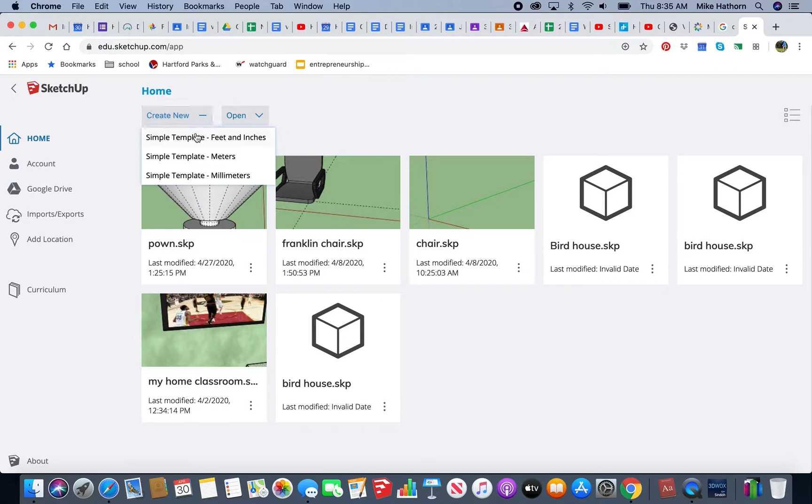Hi folks, today I'm going to teach you how to make a chessboard quick and simple in SketchUp for Schools. First thing you need to do is go to edu.sketchup.com. Once the SketchUp app opens, you're going to create new. I use feet and inches.

Delete the person. Grab the rectangle tool. Click once on the origin and then start dragging it out and click again anywhere. And I'm going to do 16 inches, comma, 16 inches, enter. Whoops, that says 16 feet, so here's how you fix the measurements.

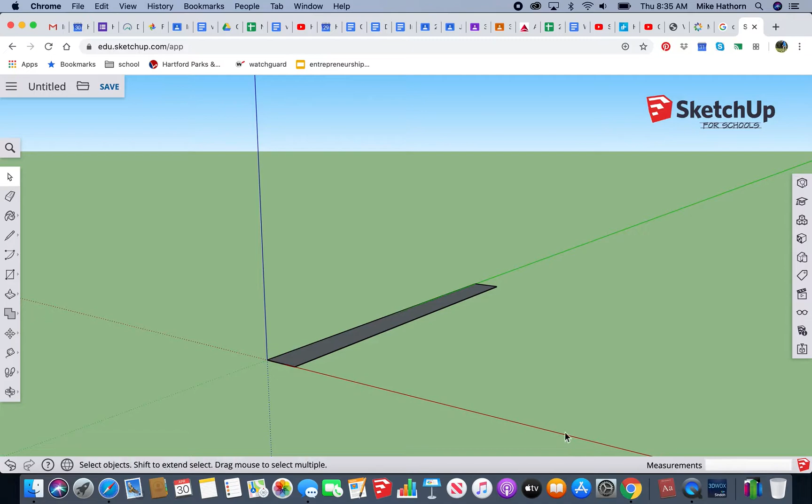Rectangle tool, origin, 16 inches, comma, 16 inches, enter. And this gives our rectangular shape for the board. Now I'm going to pull it up 1/2 inch.

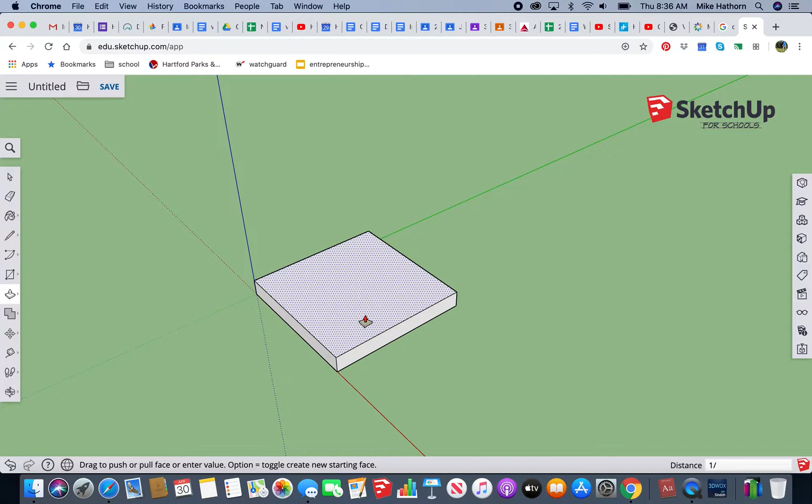I'm going to take the select tool, select one line, then the move tool with the option or control depending on the computer you're at to get the plus sign next to it. I'm going to drag it all the way to the other side. Click again, and then I'm going to go divided by 8.

Now I'm going to use the select tool with the shift key. I'm going to select 1, 2, 3. Whoops. And if you ever select something you don't want, you can just re-click on it. 4, 5, 6, 7, and 8. And then I'm going to use the move tool with the

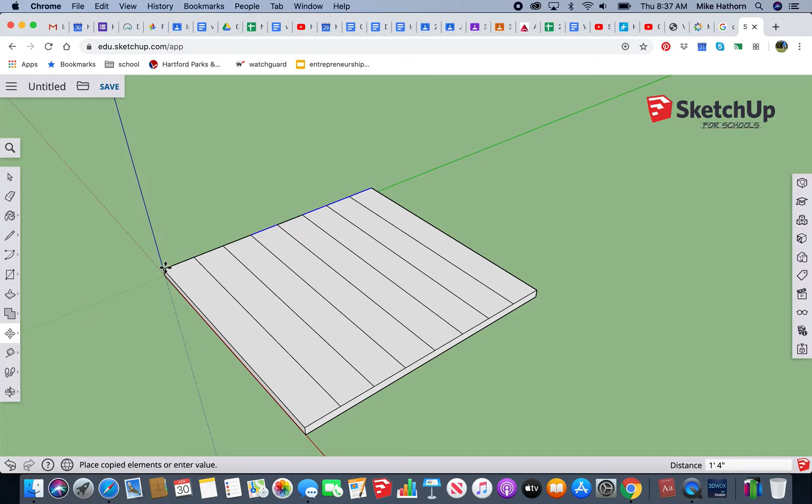option on a Mac, control on others. Move it all the way to the other side. Click it again and then divide it by 8. And that gives you your basic grid.

Now I'm going to orbit underneath the chess set. I'm going to use the offset tool. Offset it whatever looks reasonable to you. I did about 1 inch.

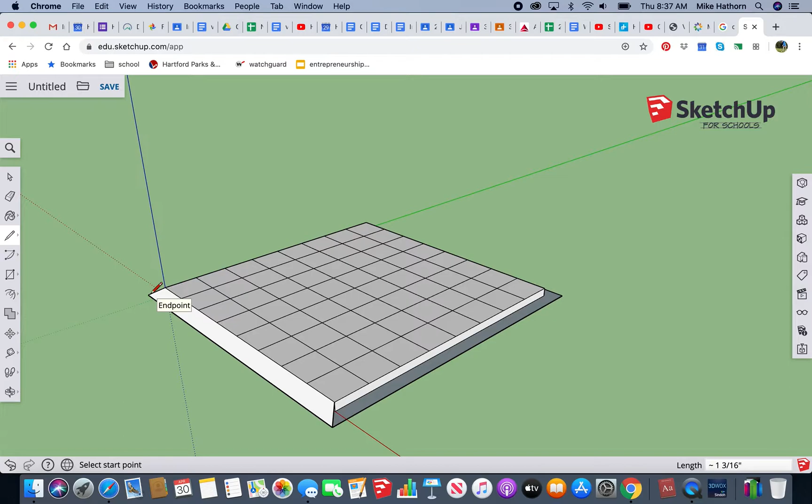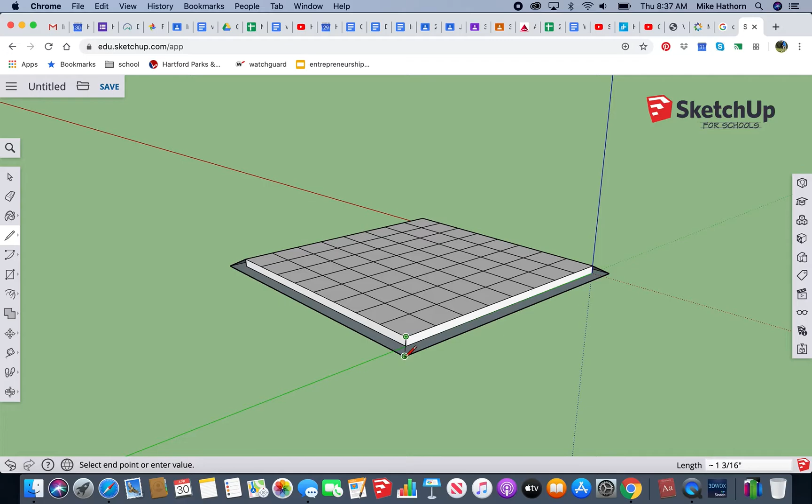Then I'm going to use the line tool, and I'm going to go corner to corner, hit the select, then the line, corner, corner. And I'm using hotkeys on my computer, so I'm hitting the space bar to get the select, and then O to orbit, L for the line, and I'm going to go corner to corner, space bar for select, O to orbit, L for line, corner to corner. Now we've got a nice, decent looking chessboard.

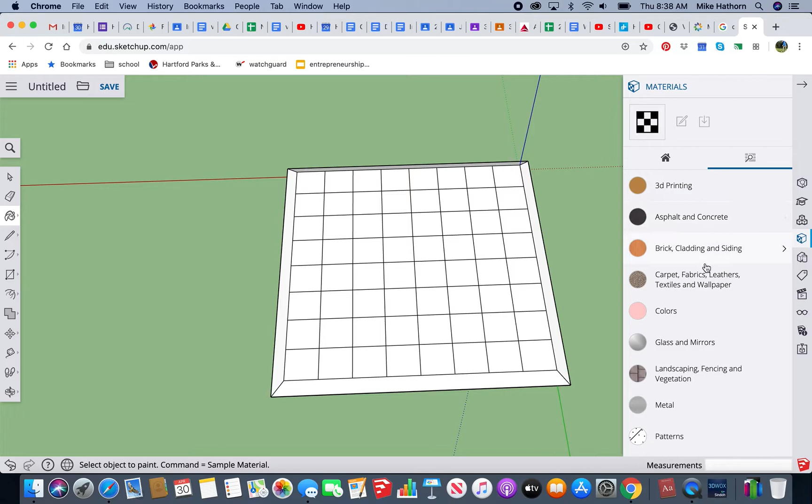We're going to start painting the chessboard. Easy way to do it is you can look for specific colors in the search. So I'm going to go colors, and you can do anything. Like if you want, here, let me shrink down the colors. I'm going to go to wood to show you that you can use 2 different color woods, which is always pretty neat. So I'll grab this one and go every other one.

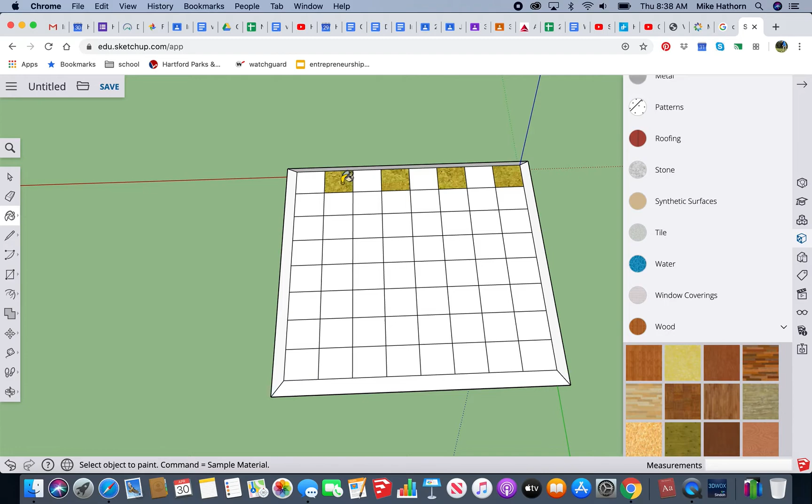And with chess, you always have a light color and a dark color for both the board and the pieces. So I'm starting with the light color, and then I'm going to pick this for the dark color. Make it a reasonably fancy looking chess set.

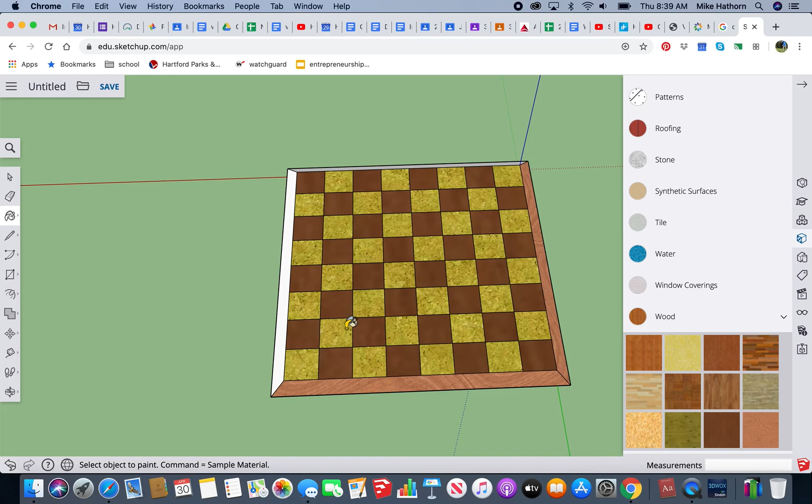Then I'm going to grab another type of wood. Go around the remaining portion of the chessboard. And there you have it. Quick and simple, beautiful looking chessboard. You're going to be using this with your chess set for the next full project.